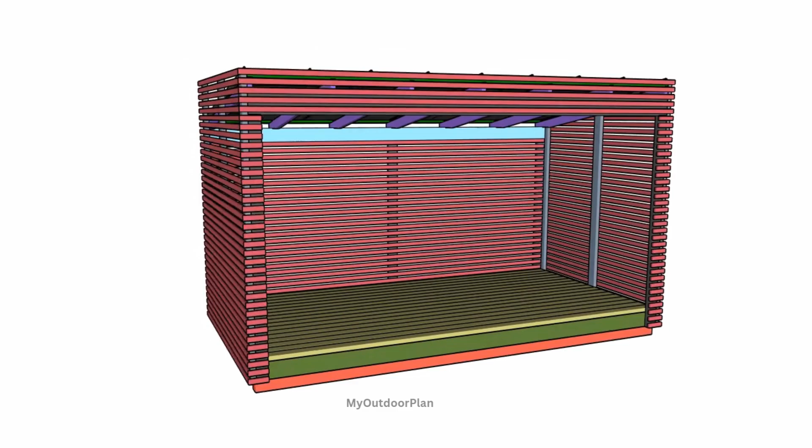Today, we're building a sleek and functional modern firewood shed that keeps your wood dry, organized, and ready to use year-round.

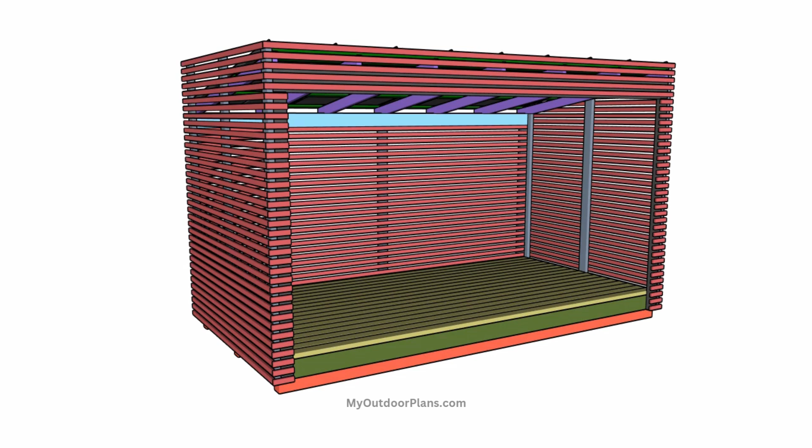Cut the 2x6 lumber to size and assemble the floor frame on a level surface. Secure the joists with 3.5-inch screws, spacing them 16 inches on center. Place the 4x4 skids evenly underneath, then attach the frame to the skids using rafter ties and structural screws for a strong foundation.

Cut the 2x4 lumber for the corner and side uprights. Secure them to the floor frame using 3-inch lag screws, ensuring they are plumb.

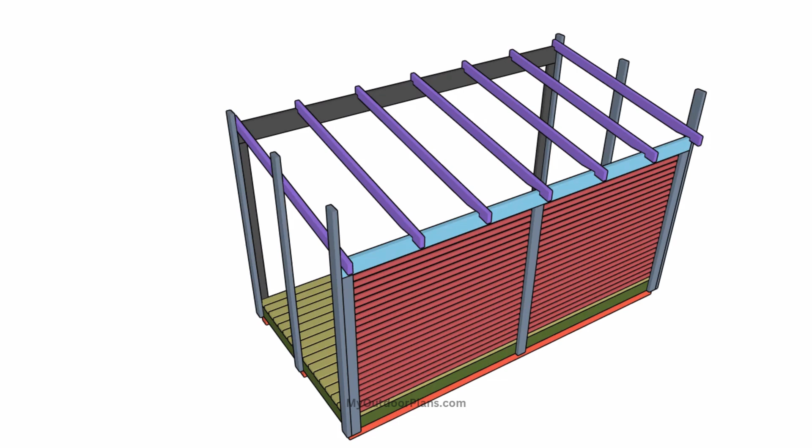Once the posts are in place, attach the front and back support beams, reinforcing the joints with L ties and T ties for added stability.

Cut the 2x4 rafters, making 9.5-degree angle cuts at both ends for a proper fit. Mark and cut notches at the top and bottom to help them sit securely on the support beams.

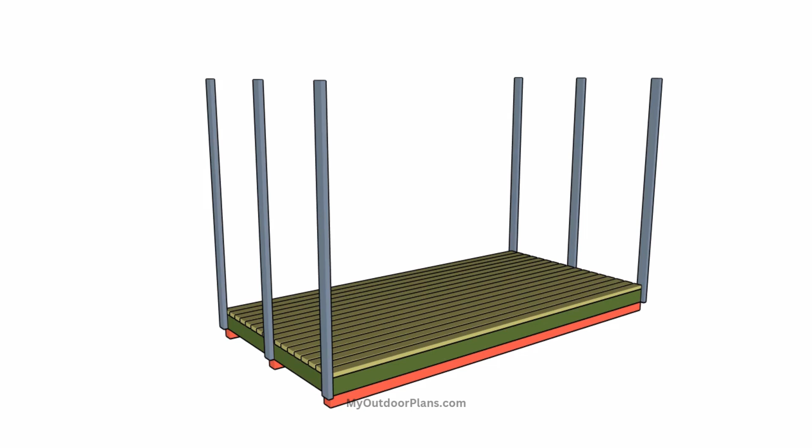Space the rafters 24 inches on center, drill pilot holes, and secure them with 4.5-inch screws. Lay out the 1x4 purlins across the rafters, spacing them 24 inches on center, and secure them with 2.5-inch screws.

Install the metal roofing panels, overlapping them for proper water drainage, and secure them with roofing screws. Add a drip edge along the sides and flashing where needed for extra weather protection.

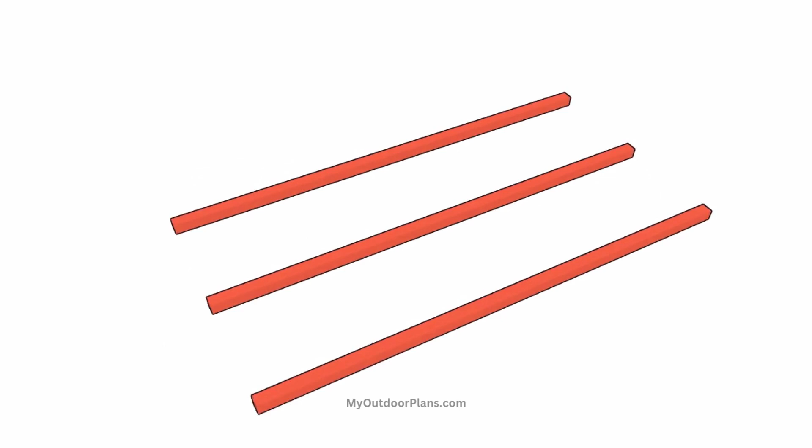Sand any rough edges and apply an exterior wood stain or sealer to protect the shed from the elements. Check all screws and fasteners to ensure everything is secure. For extra stability, place gravel or pavers under the shed to improve drainage and prevent moisture buildup around the firewood.

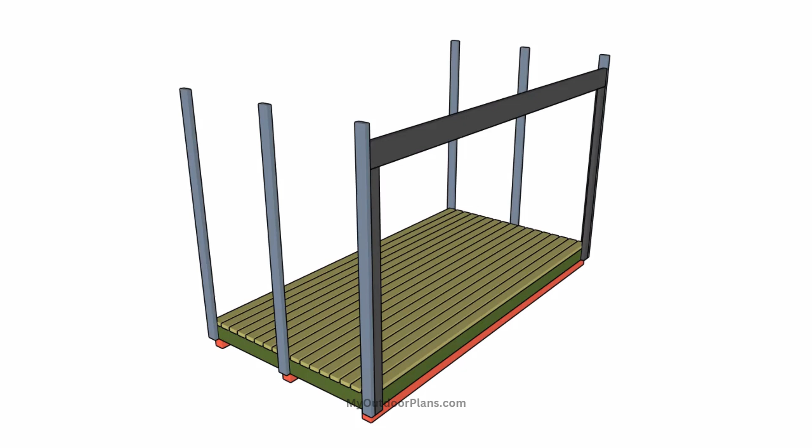Attach the 1x2 slats to the back, sides, and front of the shed, leaving a 1-inch gap between them for airflow. Drill pilot holes to prevent splitting, then secure the slats with 1 5/8-inch screws. Align everything evenly for a clean, modern look.

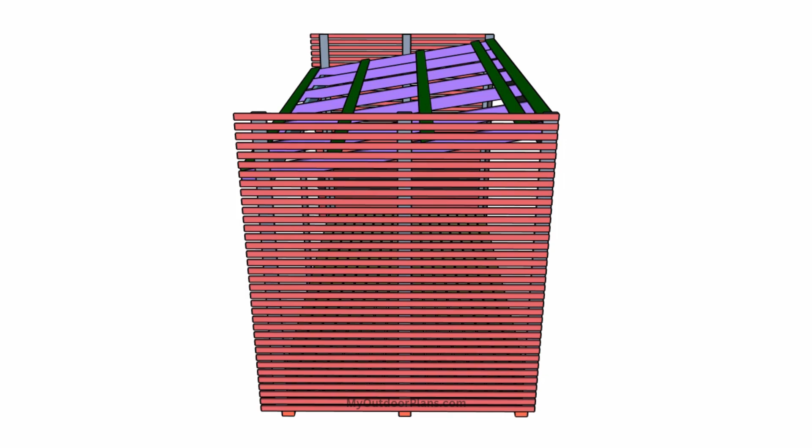With the roof installed and the enclosing slats in place, your modern firewood shed is complete and ready to keep your wood dry and neatly stacked. This sturdy 6x12 structure provides ample storage for up to 3 cords of firewood while allowing proper airflow for efficient drying.

With its durable frame, slatted design, and weather-resistant metal roof, this shed will serve you well for years to come. Now you can enjoy easy access to dry firewood all season long while adding a functional and stylish element to your outdoor space.